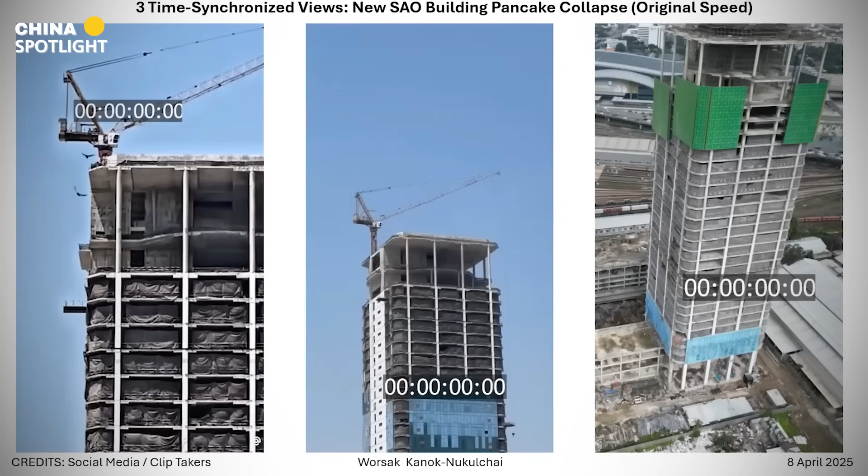How could a modern skyscraper, miles from an earthquake's epicenter, be the only building in all of Bangkok to suffer such a catastrophic collapse? On June 30th, the government delivered its verdict. The Prime Minister announced that the tragedy was not caused by faulty materials. She said, "We've clearly stated that the root cause was in the design and construction. As for who is at fault, that is for the police and DSI to determine.

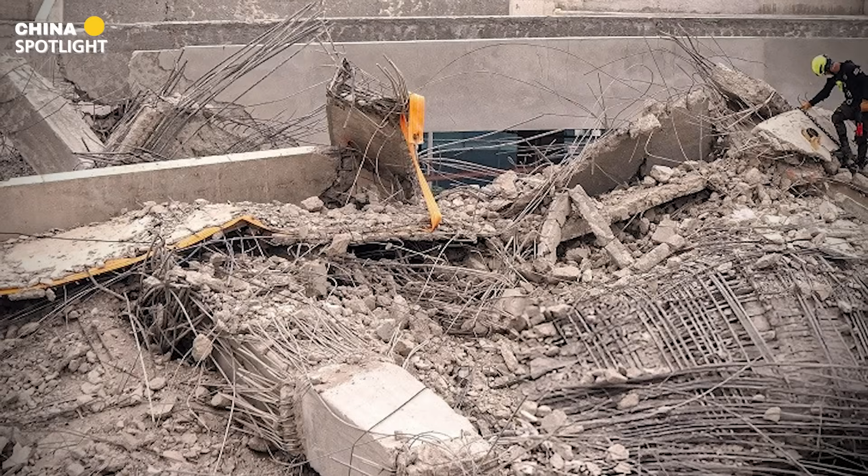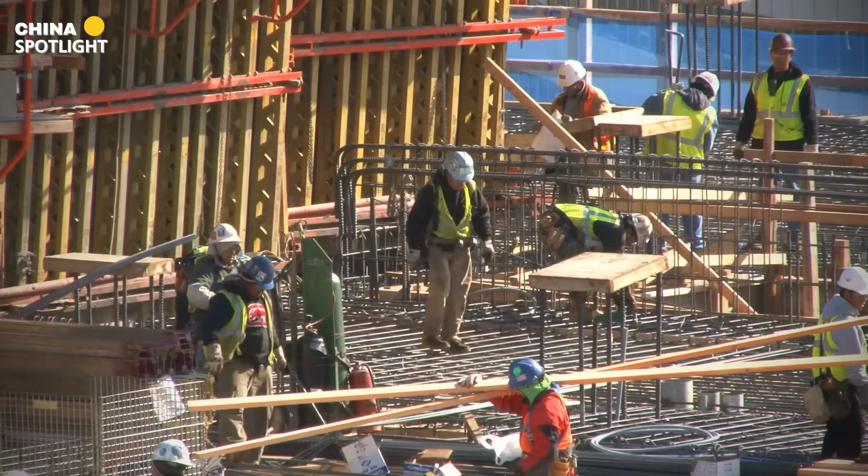The materials themselves were not the issue. But in this particular project, the steel was cut down in size and used in a way that did not comply with regulations, making it effectively illegal." She added that substandard concrete and faulty construction practices were also to blame. In other words, she stated that the steel met the required standards. The cause, she declared, was rooted in serious design flaws and construction negligence. A closed case. But is it the truth?

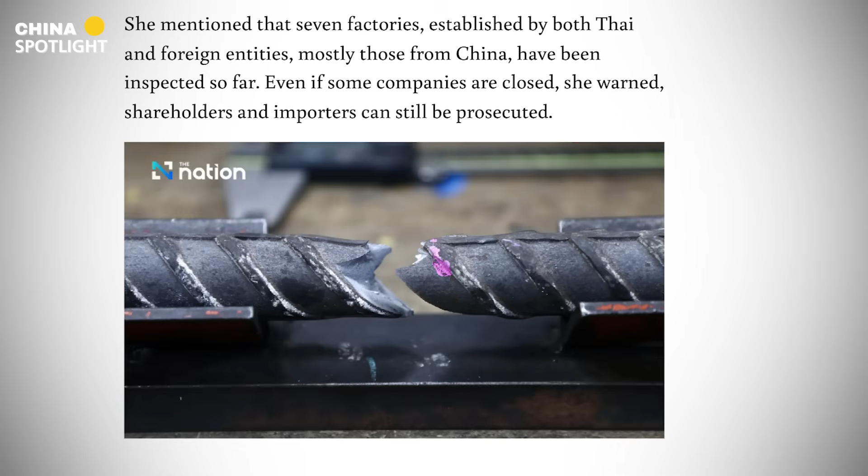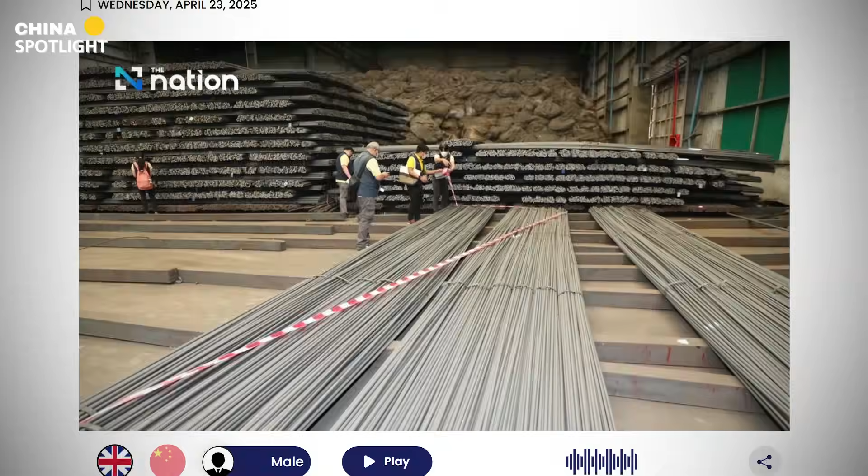If the steel was sound, why did Thailand's own industry minister, Akanat Promphan, announce on April 23rd that steel from the collapsed tower had failed safety tests for a second time? Why did he state unequivocally, "A fail is a fail, a pass is a pass," and forward those damning results to the Department of Special Investigation?

Why is the Federation of Thai Industries raising a national alarm that over half the rebar market in Thailand is now dominated by this same type of substandard induction furnace steel, warning it could compromise buildings across the country? And if this was simply a case of design negligence, why did the construction company responsible offer a mere 50,000 baht, less than $1,400 in compensation for each life lost? An offer so insulting, the Lawyers' Council of Thailand is now preparing its own legal action.

The official story asks us to believe one thing. The evidence screams another. A story of repeated test failures, of national safety warnings, and of a political narrative that simply does not add up. So what really happened inside that doomed structure? And who is truly being held responsible? Let's break down the findings that the official investigation wants you to forget.

On March 31st, Thailand's Ministry of Industry released test results showing that steel bars collected from the collapsed State Audit Office building failed multiple national standards. Lead investigator Titipas Chodachachinan confirmed the steel failed tests for mass, chemical composition, and stress endurance.

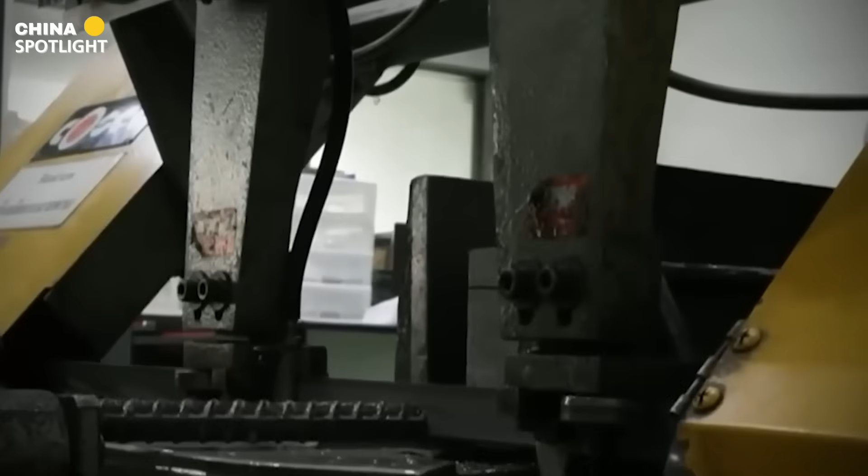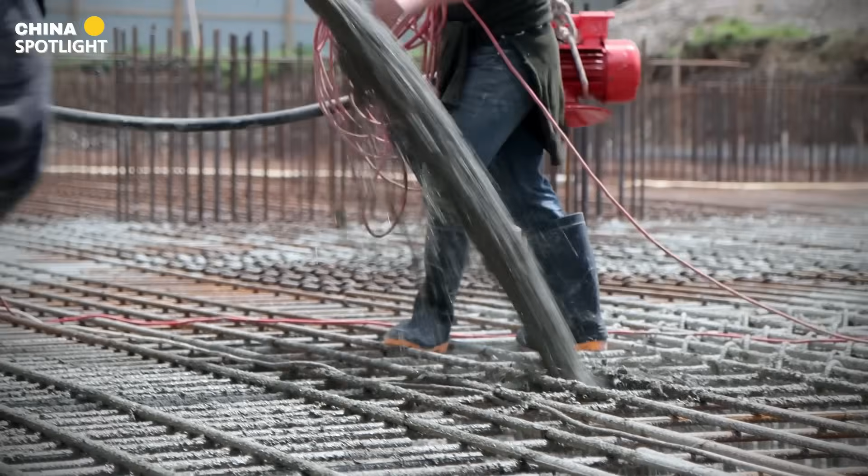"We can prosecute any manufacturer and seller of substandard products," Titipas told reporters. "We will also inspect the factory to ensure it has not violated the shutdown order." Photos circulating online show concrete slabs and rebar separating entirely, with no bonding visible between steel and cement. In proper construction, steel bars are meant to integrate with the concrete to resist structural pressure. But in this case, the rebar looked almost loose, suggesting low-grade cement, improper reinforcement placement, or rushed curing.

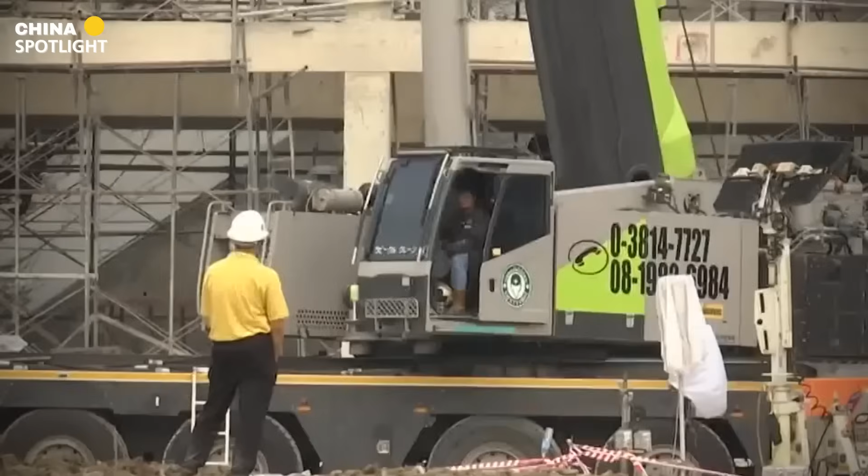In the words of one analyst, the main column on the first floor fractured as if it had been overloaded by gravity. The collapse had no resilience. The steel used was DB32 and SD50 grade, which according to Thai regulations is inappropriate for high-rise buildings. These types are known to have hard outer layers and soft interiors, making them prone to cracking under stress, especially in seismic events.

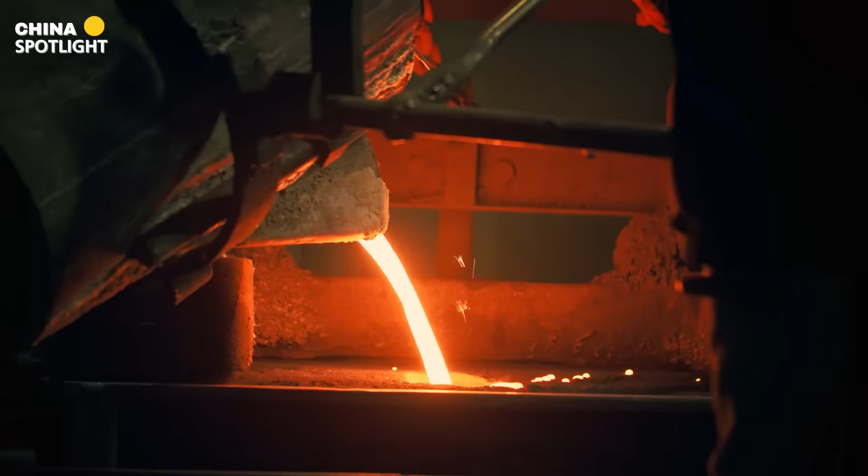Further investigation revealed that the steel bars had been rapidly cooled, a process that may increase brittleness. Bars were marked with T symbols, indicating they had undergone quenching, which can result in inconsistent strength and premature failure. The evidence suggests that substandard materials were not just present, they may have been central to the collapse.

On April 23rd, the case against the steel used in the collapsed State Audit Office building deepened. Thailand's industry minister, Akanat Promphan, took the microphone in a tense press briefing. In his hand were the latest results from the Iron and Steel Institute of Thailand. The findings were damning. Steel bars taken directly from the wreckage, specifically the SD40T 20mm variety, had failed industry standards.

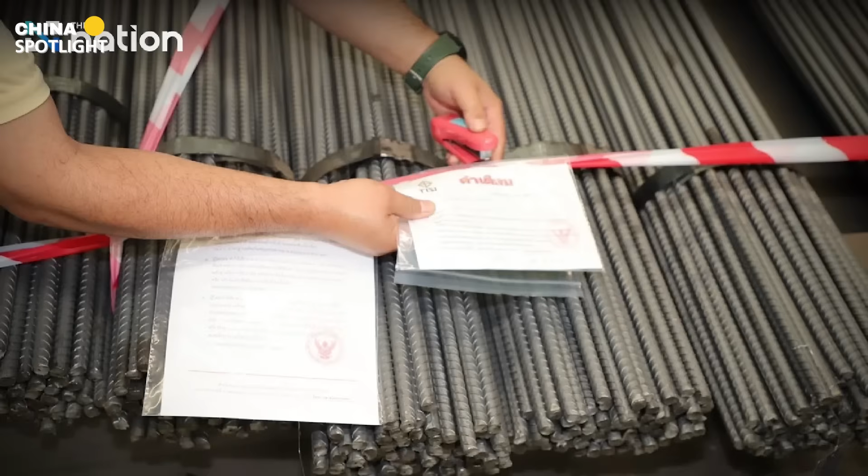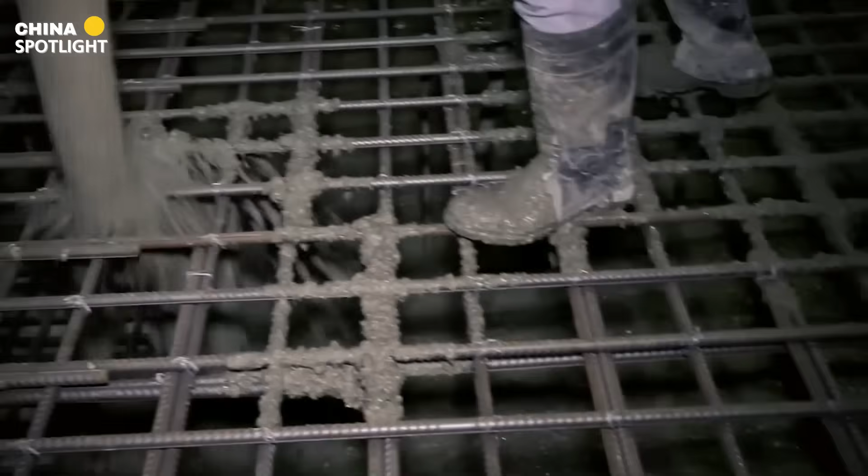Again, Minister Akanat didn't mince words. The Chinese company's SD40T 20mm steel bar failed the mass per metre test, consistent with the previous results, he said, referring to Xin Ke Yuan Steel Limited, the manufacturer. A fail is a fail, a pass is a pass. The test results were forwarded to the Department of Special Investigation as part of the ongoing probe into the SAO building collapse. Akanat emphasized that the testing procedures followed standards set by the Thai Industrial Standards Institute.

This was the second time steel from the same company had failed. And yet, the Prime Minister had already told the nation the materials were not to blame. But the story didn't end there. Less than a month later, disaster struck again. And this time, there could be no talk of earthquakes, no convenient scapegoats for why a building fell.

On May 16th, just 2 weeks before the government was scheduled to release its official report on the SAO collapse, a factory building in the Amata City Chonburi Industrial Estate, located in Phan Thong District, crumbled to the ground. Nearby cars were crushed. One person was injured. Minister Akanat broke the news on his own Facebook page. The factory had been leased since 2022 by Cosmo Manufacturing Thailand Limited.

The rubble was still settling when his investigators moved in. What they found eliminated all doubt. Steel rods, 20mm deformed bars, and 9mm rounds scattered across the wreckage. And on those bars, the same branding. Xin Ke Yuan Steel. 2 buildings, 2 collapses, same brand. Same steel. This was a pattern. Akanat confirmed it personally. Deformed steel bars and round steel rods manufactured by Xin Ke Yuan Steel were found in the rubble.

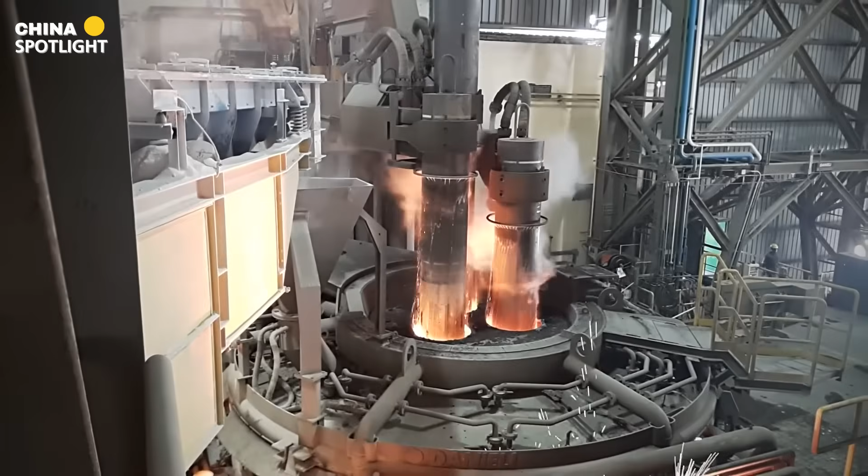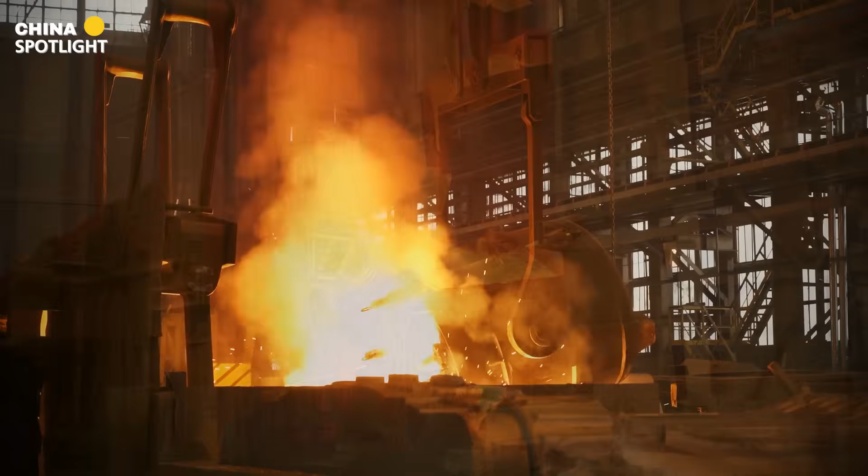The spotlight turned again to Xin Ke Yuan Steel, one of 12 steel producers in Thailand that use induction furnace technology. Unlike electric arc furnaces, EAF, the international standard for producing high-strength structural steel, IF systems are notorious for their inability to eliminate harmful impurities like boron, sulfur, and phosphorus. China itself banned the use of induction furnace for construction rebar in 2017, but not before some induction furnace producers, shut down at home, relocated to ASEAN countries, including Thailand.

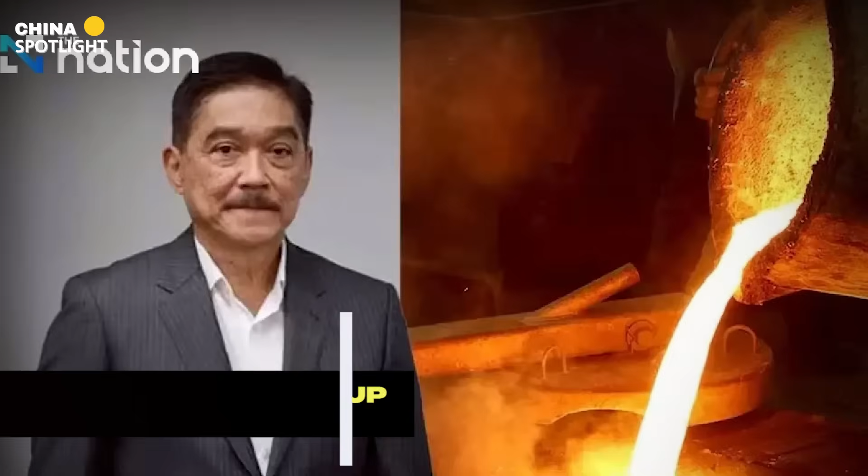The Federation of Thai Industries, FTI, issued a nationwide safety warning. IF steel, they reported, now makes up 55% of Thailand's rebar market, a staggering 1.6 million tons annually. And that, they warned, is putting lives at risk. Vikram Wacharakub, a senior FTI advisor with over 50 years in the steel industry, stated, "Induction furnace is suitable for precision casting and non-ferrous metals, not for structural steel. It cannot consistently remove impurities. The risk of structural failure in a disaster is too high."

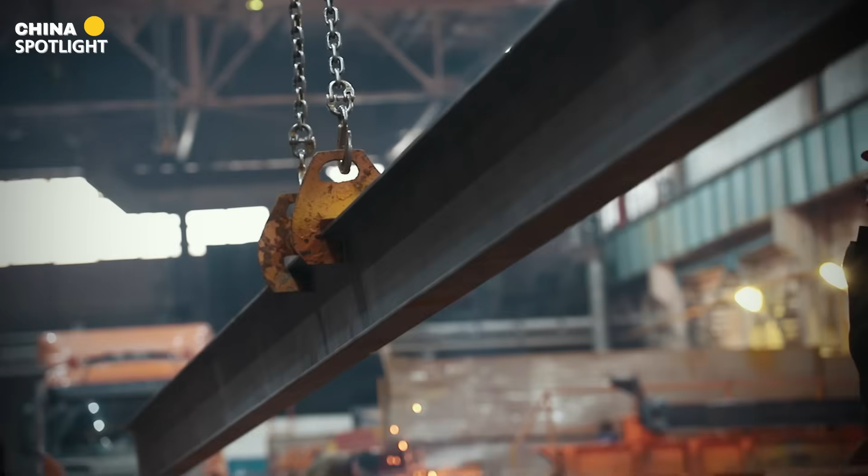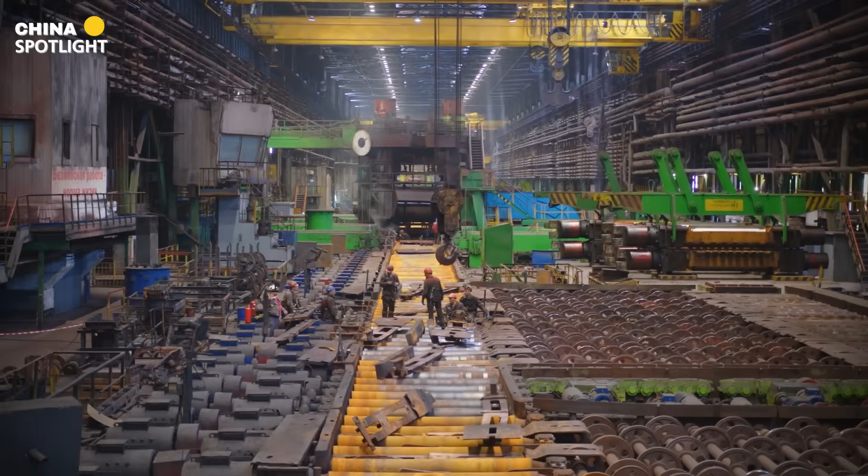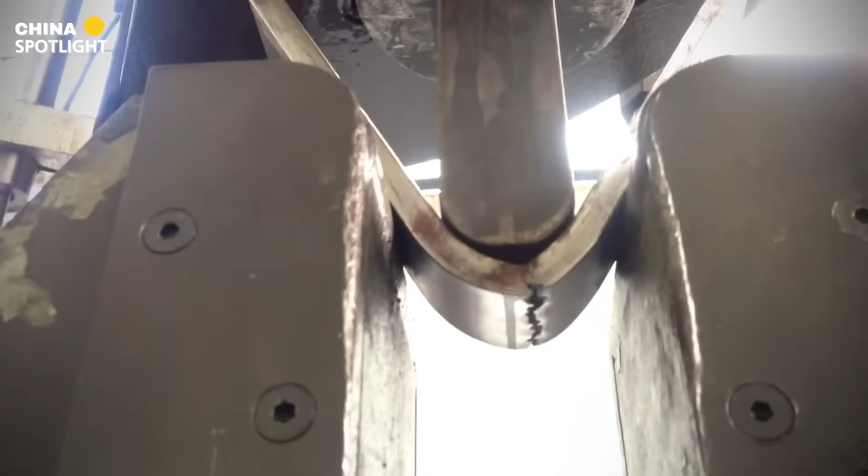According to the FTI, the problem isn't just isolated test failures, it's systemic. Consider these recent findings. Over 7,000 tons of IF steel were seized after testing revealed dangerously high boron levels and low tensile strength. Some batches were found contaminated with electronic waste. In Phuket, rebar snapped during basic bending tests, failing safety standards outright. EAF was the only approved method.

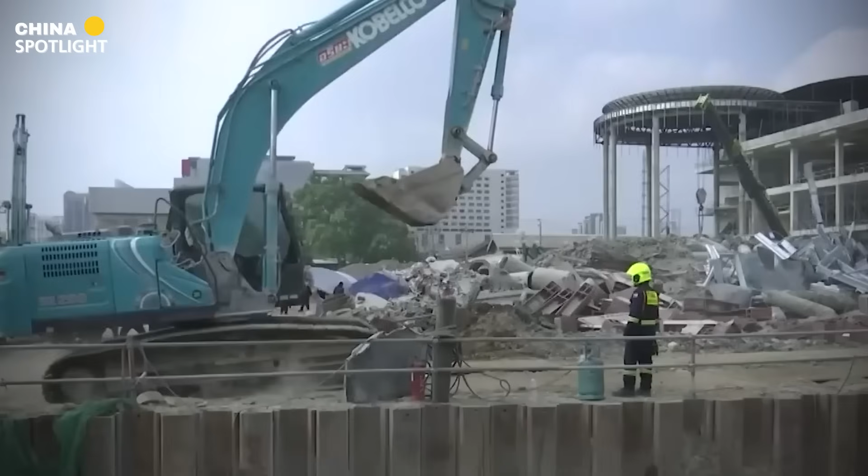And while the government continues to argue that materials weren't the root cause of the March collapse, public trust is eroding fast. If the steel was not to blame, why does it keep failing tests? Why does it keep turning up in rubble? And why is it that the families of 96 dead were offered just 50,000 baht, less than $1,400 USD per life, as compensation? Even Thailand's Lawyers' Council has intervened, calling the offer a national insult and preparing legal action.

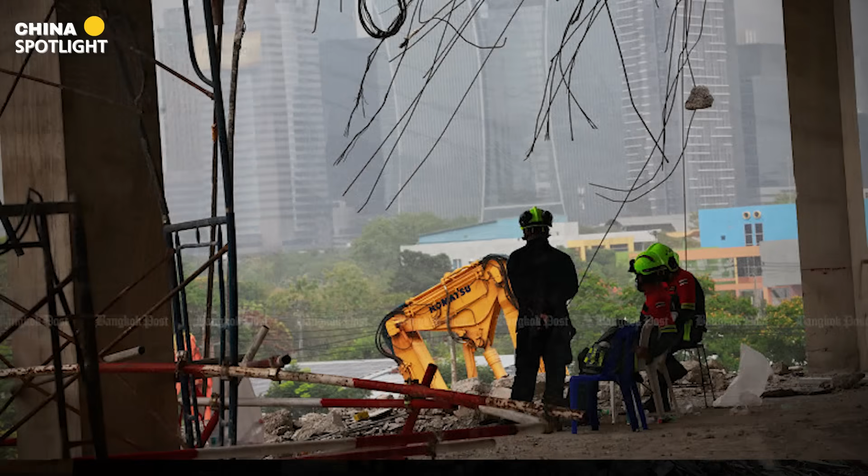The Thai government insists that the building collapse was the result of human error, that its design was flawed, that the contractors failed, that the regulations were ignored, that the steel was legally compliant but misused. So did the building's design really contribute to its own destruction? On April 18th, Deputy Prime Minister and Interior Minister Anutin Charnvirakul addressed the public, stating that an official government panel under his leadership had found that the SAO building was asymmetrical in design. This flaw, he explained, likely made the structure vulnerable to the lateral forces generated by the March 28 earthquake.

Anutin said, "If a building is asymmetrical, it can be twisted when swayed by strong winds or earthquakes. Engineers must know how to increase the strength of an asymmetrical building to keep it in balance and help it withstand the forces," he added. "The panel needs to undertake thorough calculations to get rid of room for doubts and boost confidence in the findings. Engineering principles are scientific."

They don't allow room for discretion." In other words, the geometry of the building may have been its fatal flaw. The panel's conclusions echoed those of one of Thailand's most respected engineering minds, Professor Emeritus Dr. Worsak Kanok-Nukulchai. He is the former president of the Asian Institute of Technology, a fellow of the Royal Society of Thailand, and a structural engineering expert.

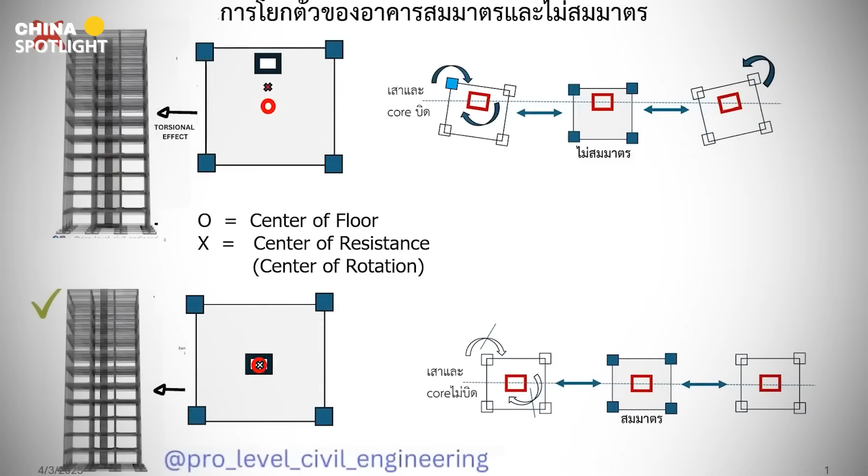In a 28-minute video published on April 14th, Dr. Worsak explains that when the earthquake hit, the building's asymmetry caused it to be twisted while it was being swayed. This twisting force, or torsion, is always most critical at the point where the building is held rigid, its base. This is where the restrained warping occurs.

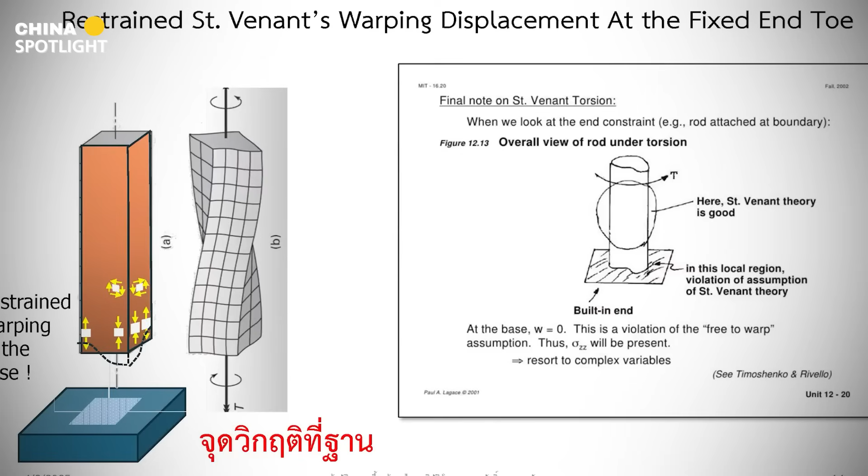Imagine holding a ruler at one end and twisting it. All the stress concentrates in your hand. For the SAO building, the ground was that hand. The cyclic, back-and-forth twisting motion of the earthquake relentlessly attacked the shear walls and supportive columns at the ground floor.

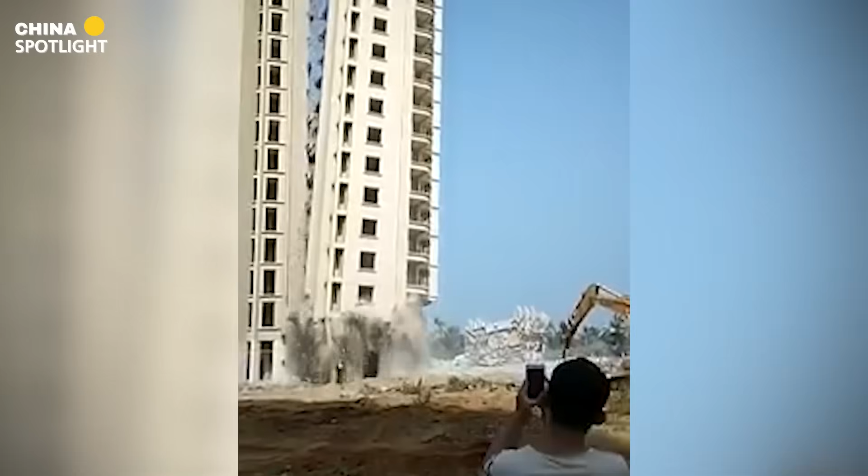In his analysis, Dr. Warsak mentions two types of full building collapse. 1. Ground floor failure, where foundational structural supports, especially interconnected shear walls and vertical columns, are destroyed first, causing the entire building to lose its base and collapse downward with accelerating force. 2. Floor progressive collapse, where upper floors collapse in sequence due to structural failures above.

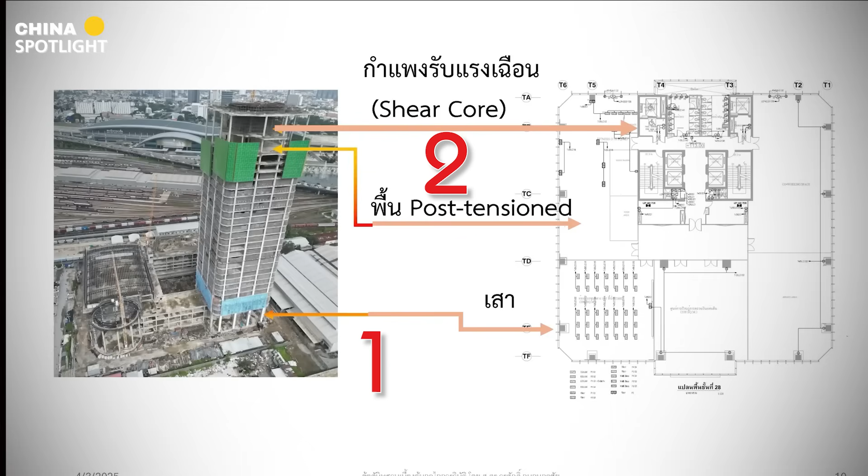He states that the SAO building collapsed due to the first type, ground floor failure, within just 8 seconds of the earthquake's impact. He said, Let's understand the SAO building structure. It's a 30-story reinforced concrete high-rise, consisting of 1. Columns, for vertical loads. 2. Shear core or elevator walls, to resist wind and earthquakes. 3. Post-tensioned flat slabs, for floors.

The shear cores weren't centered. They were near the building's edge, displacing the center of torsion from the geometric center, causing twisting when the building swayed. Imagine a building with 4 corner columns and an off-center shear core. The center of rotation doesn't align with the building center. When the building sways, it also twists, not just rocks back and forth.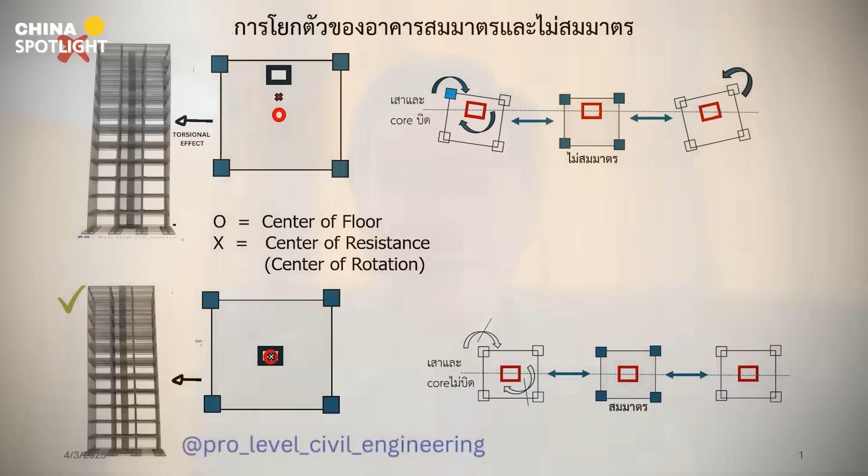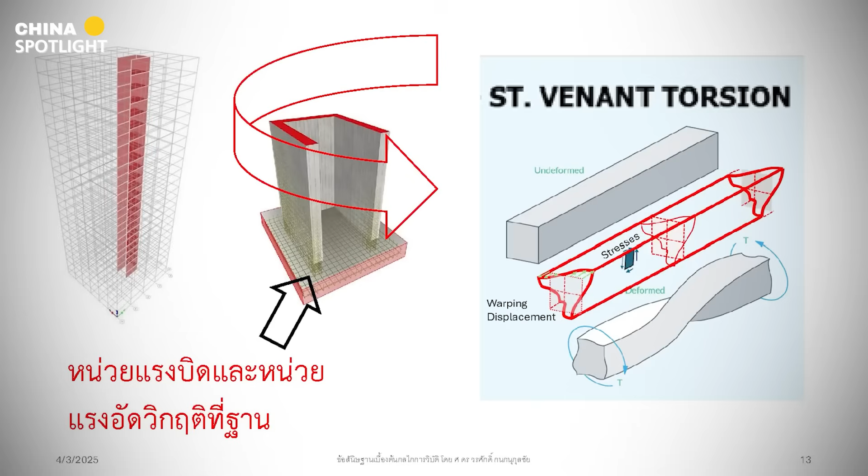According to continuum mechanics, twisting a material back and forth generates shear stress, distorting flat cross-sections and creating warping, especially at the base where the core anchors to the foundation. Lab studies show that repeated torsion of reinforced concrete elements causes diagonal 45-degree cracks, weakening and ultimately disintegrating the concrete into powder. This likely happened to the elevator shaft walls during the earthquake-induced swaying and twisting.

The walls failed first, followed by the columns that bore the redistributed loads, all within split seconds, leaving the building unsupported and causing a total freefall collapse. This gravity-driven collapse left no time for tilting. It dropped straight down in 8 seconds.

At the 2-second mark, the top of the building's shear core begins to move. To the untrained eye, it looks like the failure is starting at the top, but Dr. Worsak explains this is a fatal illusion. That movement at the top is only possible because, by that point, the shear walls at the ground floor had already been destroyed. The top of the building was moving because its foundation was gone.

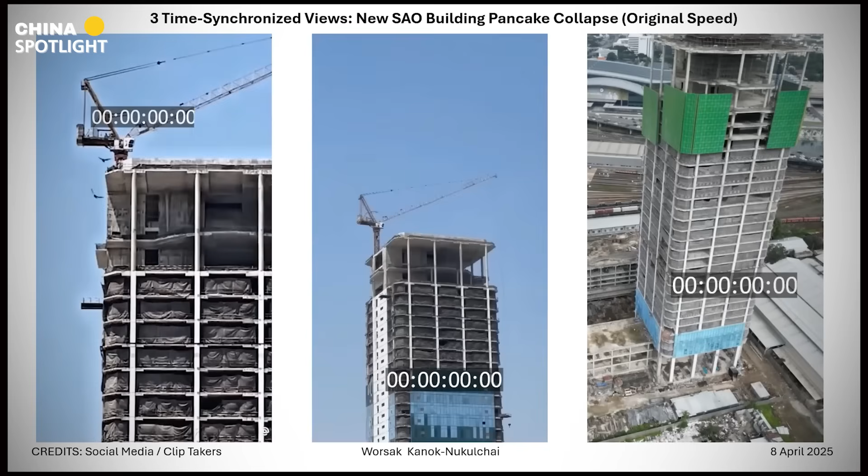By the fifth second, with the shear core obliterated, all the building's massive weight was transferred to the supportive columns. Lacking the strength of the core, they too failed instantly. With its foundation completely erased, the entire 30-story structure was, for a moment, hanging in the air before gravity took over. By the 8th second, it fell vertically, almost in a free fall, pulled down by the simple, brutal equation of physics. Force equals mass times acceleration.

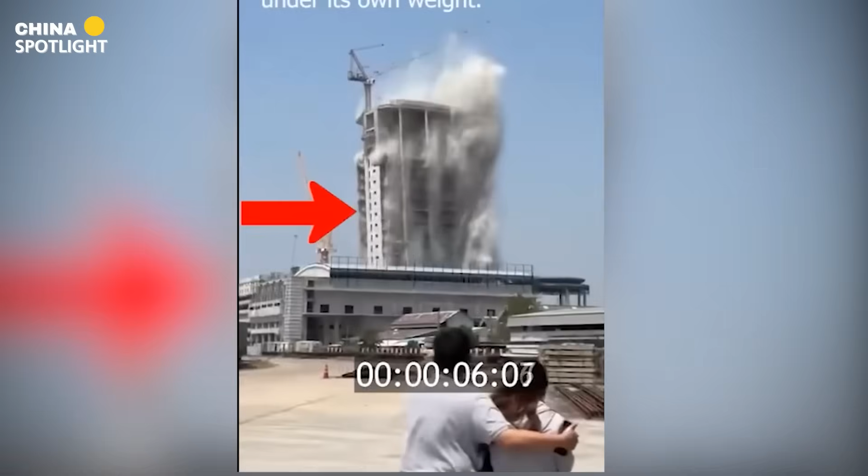The immense potential energy stored in its height was released in an instant, crashing down with a destructive power that left nothing but a stack of concrete pancakes. And that's why virtually none of the building's core shear walls remained standing. The collapse was vertical, violent, and absolute. The structural supports were literally torn apart by restrained warping, what engineers call cyclic torsion. This twisting motion, combined with gravitational force, shattered the building from the base upward.

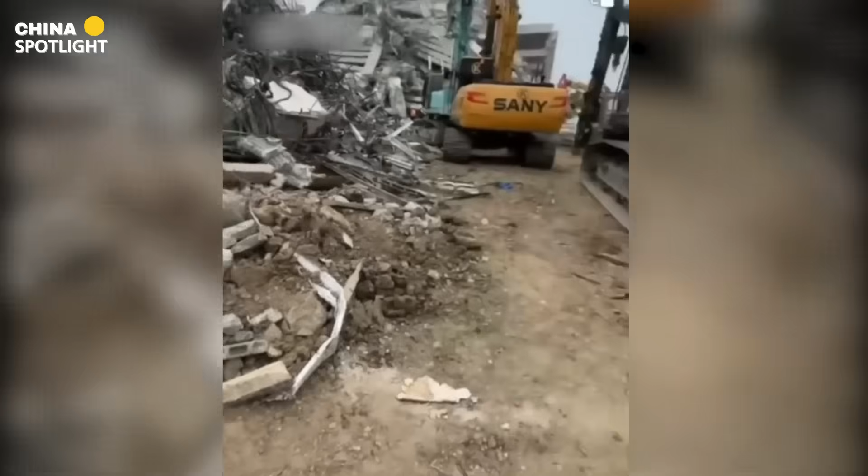Dr. Worsak concluded, It left almost none of the structures to stand, due to its great loads that fell fast and crashed hard, except for a stack of concrete pancakes. And this is the reason why we can hardly see any parts of the shear core of the building left at the scene, while the concrete slabs are so brittle.

This is a destructive power of potential energy that was accumulated for a long period before being suddenly released, in just 8 seconds. The professor addressed this type of collapse as tragic, as it hardly leaves any room for those trapped in a collapsed building to survive.

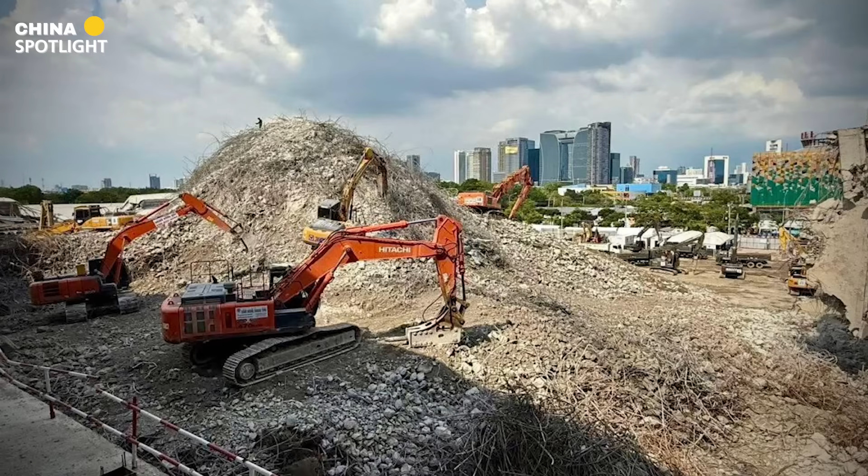But were these design irregularities avoidable? And did the builders follow the law? A representative from the Council of Engineers Thailand, COE, told Parliament's Budget Committee that the SAO building did not comply with the 2007 ministerial regulation under the Building Control Act, BE 2522, legislation introduced after the 2004 tsunami to ensure earthquake resistance. The COE found irregularities in the structure, especially from the first floor to the building's midsection.

These included design features that were not in line with the 2007 regulation. That regulation was further revised in 2021 to increase resilience against seismic events. The COE representative said, "Normally, we will see first if a building is regular or irregular. There are at least 16 points to check for irregularities in building designs and constructions. And based on our calculations, we have found some of those from the first floor to the middle of the height of the building. So, at this point, we said it's not in line with the regulation."

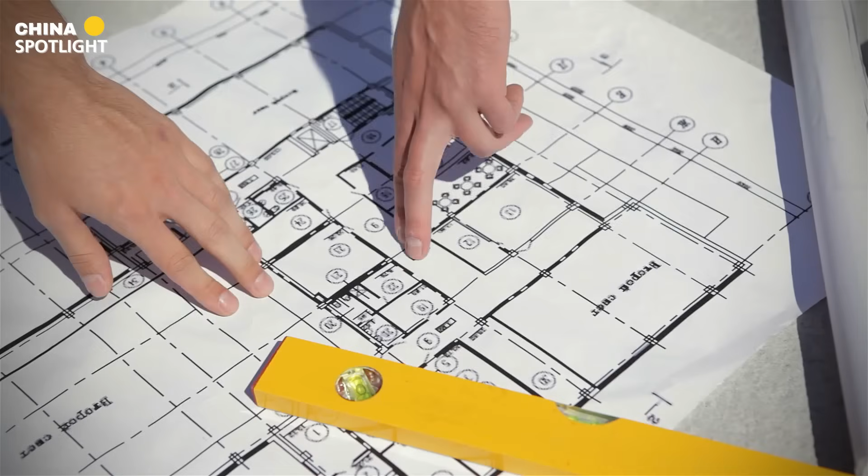However, the COE has not formally concluded whether these irregularities were illegal or contributed directly to the collapse, adding that they need to look into more detail. Illegal design. The State Audit Office, SAO, responded to rising public concern by releasing a formal clarification on April 24th. The statement emphasized that all design changes, including those to the elevator shaft wall thickness, were legal, approved, and documented.

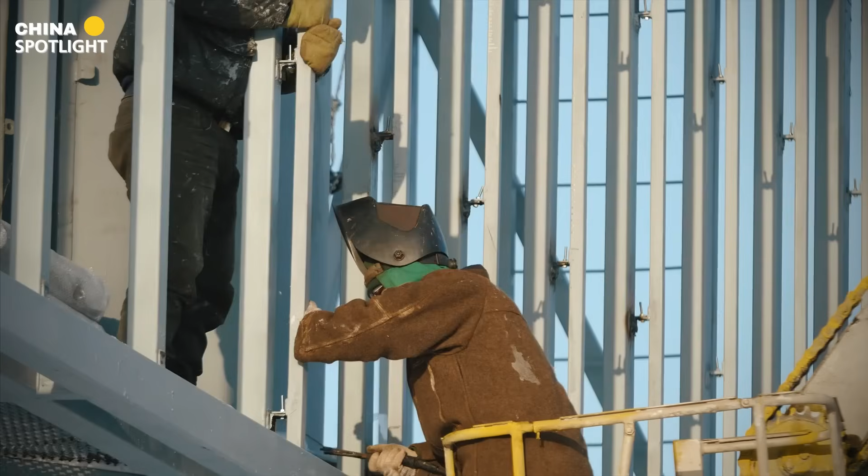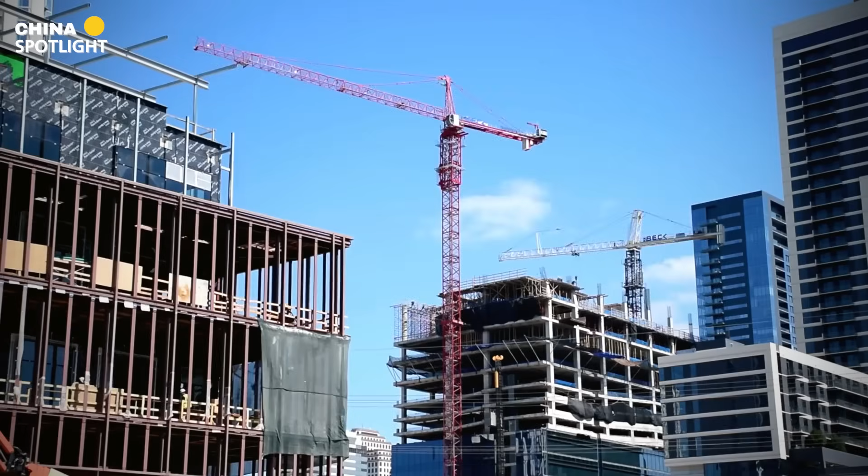They explained that the wall modification, reducing thickness from 0.3 meters to 0.25 meters, was made after a conflict was discovered between the structural and interior designs. The change was approved by the design team, supervision team, and reviewed by a licensed senior engineer. The cost-saving proposal was also approved by the State Audit Commission under Thailand's Public Procurement and Supplies Administration Act of 2017. All actions were taken transparently, the SAO insisted, in strict compliance with relevant regulations to ensure structural safety, legal adherence, and financial accountability.

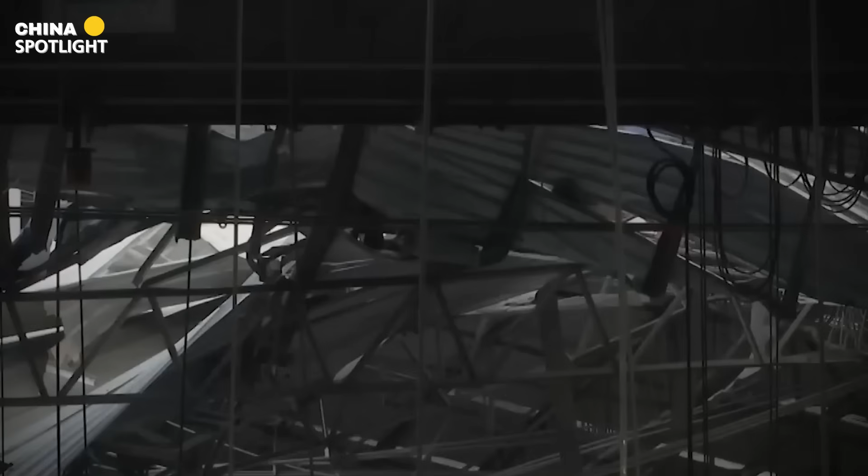So how does one reconcile these contradictory statements? The COE says the building design did not comply with the 2007 Building Code. The SAO says every design decision was approved by all relevant authorities. And the Prime Minister says the collapse was not due to material failure, but improper use. Yet the material in question, steel bars from Xin Ke Yuan, failed national standards twice, was found in 2 collapsed buildings and was produced using outdated furnace technology, banned in China itself.

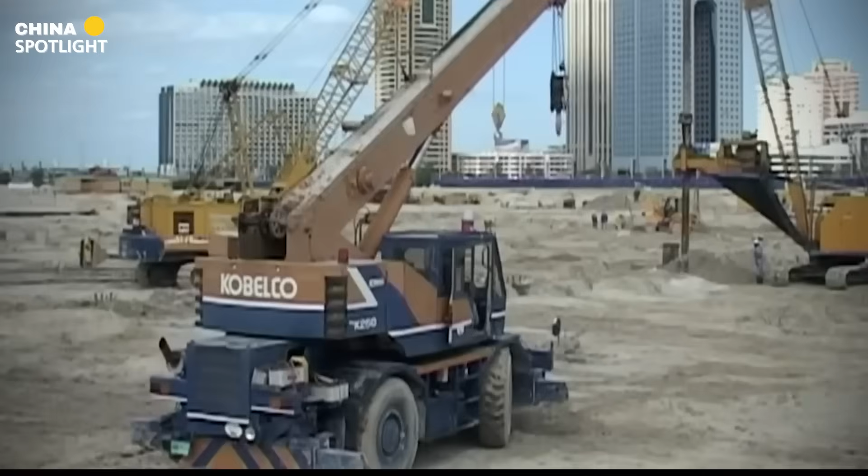But this leads to the final, most troubling question. If the evidence for material failure is so strong, and the physics of the collapse supports it, why was the official verdict so different? To answer that, we must leave the world of engineering and enter the far more complex world of politics. Let's be clear about who was involved. The steel supplier, Xin Ke Yuan Steel, is 80% Chinese-owned and was operating despite its Rayong factory being shut down by Thai authorities in December 2024 for producing this exact type of non-compliant steel.

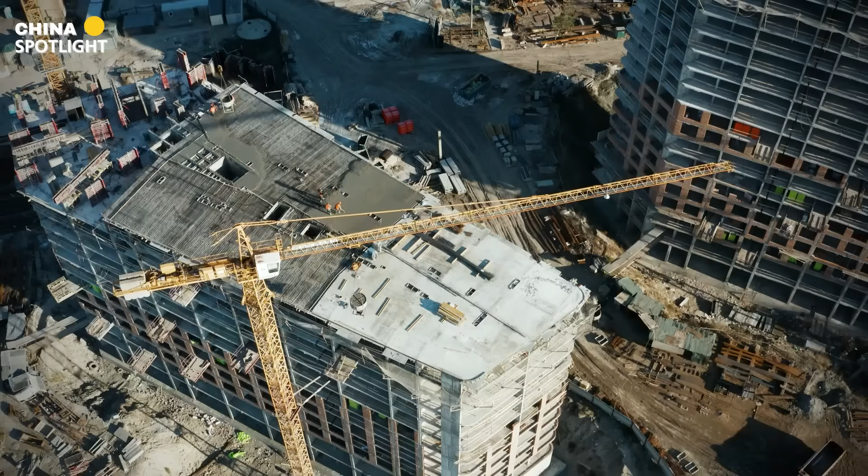The main contractor responsible for building the State Audit Office Tower was China Railway No. 10 Engineering Group, a subsidiary of China Railway Construction Corporation, CRCC, a powerful Chinese state-owned enterprise. But as the SAO building project progressed, signs of rushed timelines, cost-cutting, and growing concerns started to surface. According to statements from Mana Nimitmongkol, chairman of Thailand's anti-corruption organization, the Audit Office project had been under scrutiny as early as January 2025, due to severe delays, labor shortages, and suspected use of substandard materials.

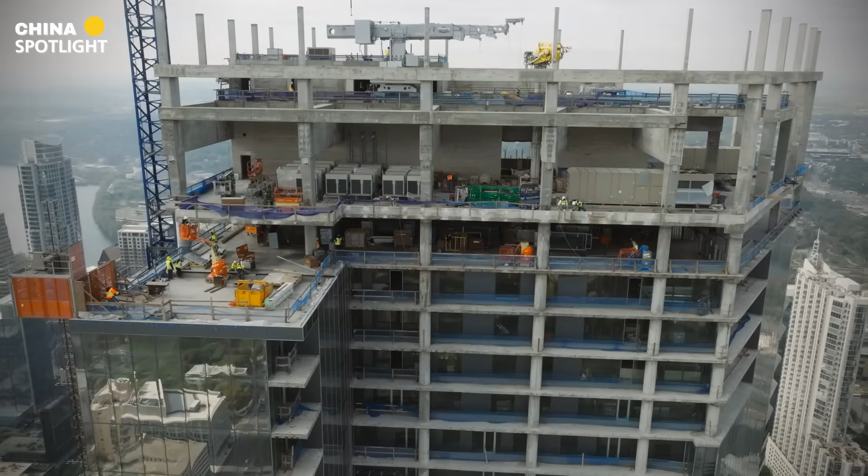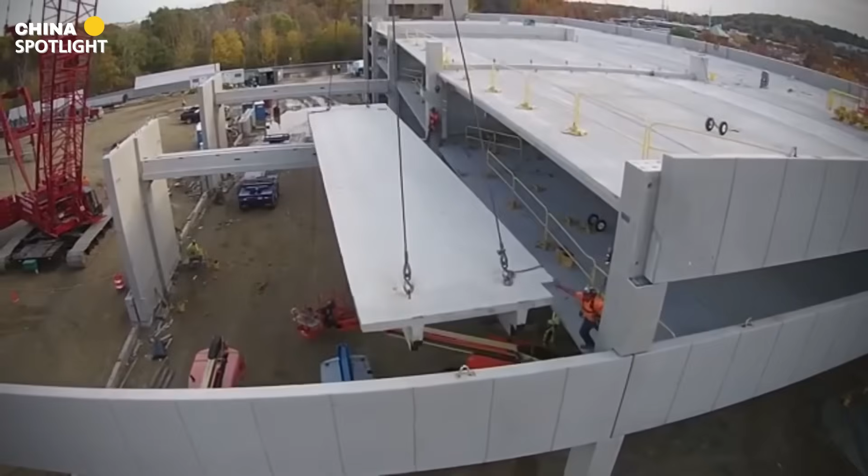He revealed that his organization visited the site multiple times and found that the number of on-site workers was far below the required amount. Construction progress was slower than expected, but paradoxically, signs of rushed finishing work began to appear. As deadlines loomed, it's likely that contractors attempted to accelerate progress by cutting corners, removing temporary supports too early, undercuring concrete, or rushing grouting and pre-stressing procedures. All of these are high-risk shortcuts in high-rise construction, especially in buildings relying on beamless slab systems, where structural tolerance is narrow. There may have been a rush to finish, which led to neglecting construction quality, Mana stated.

This collapse happened at a time when Thailand's economic and political alignment with Beijing has become more critical than ever. It happened within an economic ecosystem that is now fundamentally dependent on Beijing. This isn't a minor partnership. It's a $107 billion economic lifeline.

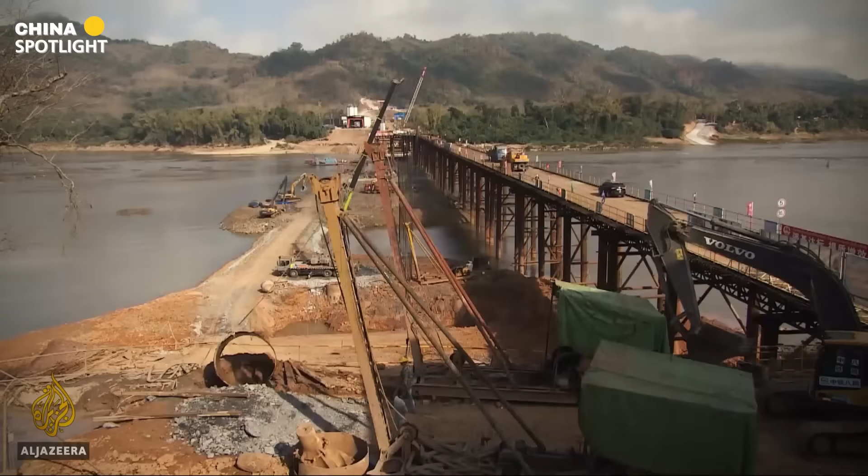That was the value of Sino-Thai trade in 2022 alone, accounting for nearly a fifth of all of Thailand's foreign trade. In 2020, China did the unthinkable. It dethroned Japan as the single largest source of foreign investment in Thailand, a position Japan had held for 5 decades. Chinese investment is pouring into Thailand's most critical future industries.

From multi-billion baht deals with EV giants like BYD, to strategic ventures in agriculture aimed at bolstering China's own food security. Even Thailand's tourism sector, a pillar of its economy, expected Chinese visitors to contribute over $13 billion in 2023 alone. But this reliance created a critical vulnerability.

By the first half of 2025, the government was already grappling with a 34% plunge in Chinese tourist arrivals, forcing officials to slash their annual projections and raising alarms about the country's economic recovery. Any diplomatic incident that could worsen this decline would have immediate and severe consequences.

This partnership extends from the boardroom to the battlefield. Between 2002 and 2022, Thailand had the 4th highest number of military interactions with the People's Liberation Army of any country. Regular joint exercises and the purchase of Chinese tanks, drones, and naval hardware signal a deep strategic alignment, a significant pivot for a traditional US ally.

And in return for this economic and military partnership, there appears to be a political price. In 2015, despite a global outcry from the United Nations and human rights organizations, Thailand's military junta forcibly deported over 100 Uyghur refugees, men, women, and children who had fled persecution, directly into the hands of PRC authorities. It was a shocking move for a country once seen as a safe haven.

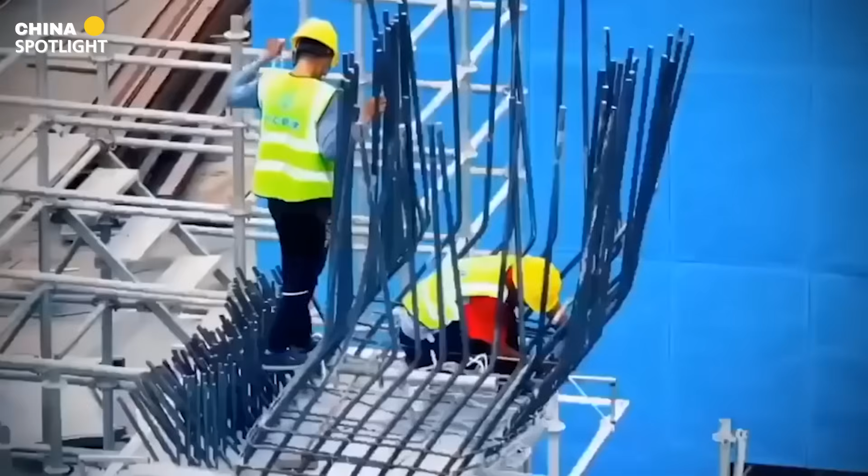Option A: confront the evidence. Name the defective materials and pursue full accountability against the foreign entities responsible. This would mean publicly indicting a major Chinese state contractor, triggering a diplomatic firestorm, and jeopardizing the billions in investment vital to their economic agenda.

Option B: localize the blame. Frame the collapse as the result of domestic design and regulatory failure. This contains the crisis within national borders, shields powerful foreign state-owned firms from direct culpability, and preserves the crucial flow of Chinese investment and political goodwill. The government chose option B.

On June 30th, the Prime Minister announced that the materials were not the primary fault. The blame fell on design flaws and poor construction methods. The substandard steel, which her own industry minister had twice confirmed failed safety tests, was barely mentioned. The official narrative, while not dismissing the tragedy, effectively diffused its explosive international dimension.

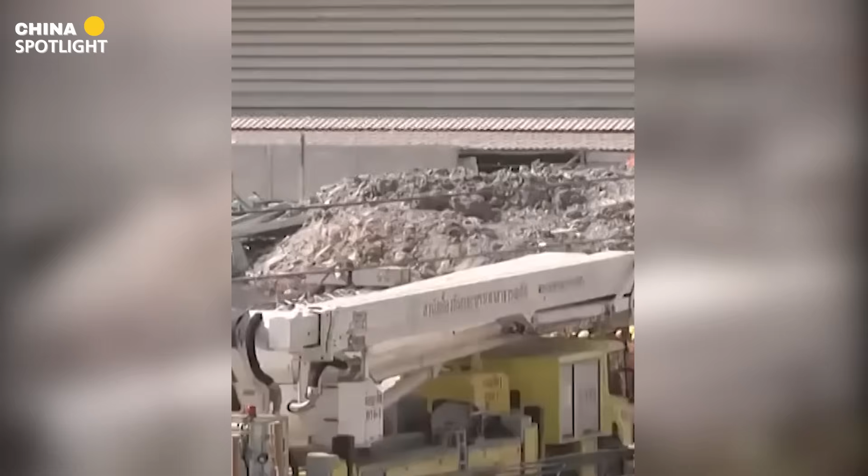For the families of the 96 victims, the tragedy was not theoretical, it was final. Their loved ones were buried under floors of collapsed concrete and crushed steel. Steel that failed, visibly and verifiably. In return, they were offered 50,000 baht per life, barely $1,400 USD, and a narrative that deflected from the root cause.

The collapse of the SAO building was a collapse of standards, a collapse of enforcement, and ultimately, a collapse of truth. The engineering tells us how it fell, the material evidence shows us why, and the geopolitical context explains how the truth was managed, strategically, selectively, and perhaps inevitably.

It is not about blaming a government for seeking investment. It is about demanding accountability when that investment comes at the cost of lives. If Thailand is to build with integrity, it must also investigate with integrity. Because in the end, no economic corridor, no infrastructure project, and no diplomatic balancing act is worth the silent erasure of the facts, or the memory of those buried beneath them.